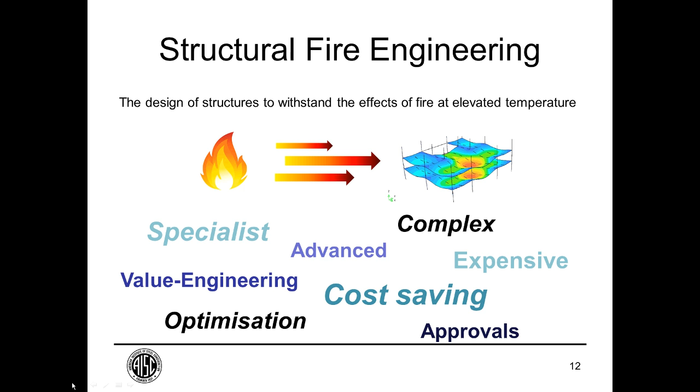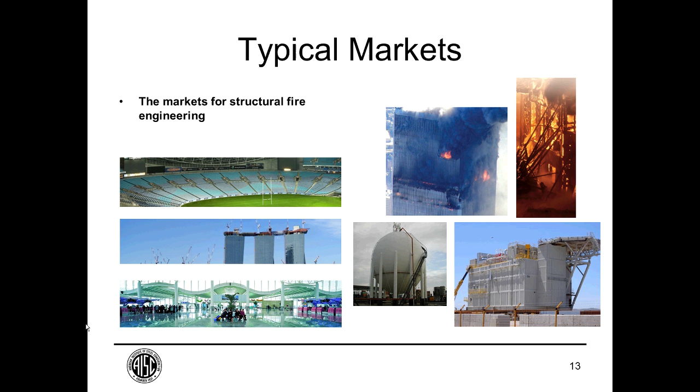And what are some of the benefits of doing this? Well, we touched on it earlier - cost, and it undoubtedly is one of the key reasons for doing this. But also looking at things like robustness, that's very important, maintaining acceptable levels of safety. Often structural fire engineering approaches can be used to permit more innovative and complex buildings, which were not necessarily possible due to prescriptive natures of some codes.

For example, very long span beams or truss systems, which when we try to correlate what we test in a furnace on a short scale, and we try to look at the understanding of performance at long scale, becomes a little bit more different. But architects these days are very keen to look at big open plan floor spaces, long span members, and it's trying to combine that innovative design together with structural analysis at high temperature, together with robust design, which is very important.

On the issue of robustness, this approach can be used to identify and strengthen weak links in a structure. If we design at ambient temperature, everything seems fine, the structure stands up. But from a thermal, high temperature perspective, it's not implausible that we could identify weak connections. We could look at columns, beams, or joints that need strengthening. As things expand due to heat, it generates strange forces which need to be considered. Likewise, as steel members cool, they generate contraction forces, which can cause redistribution that should be considered in a fire.

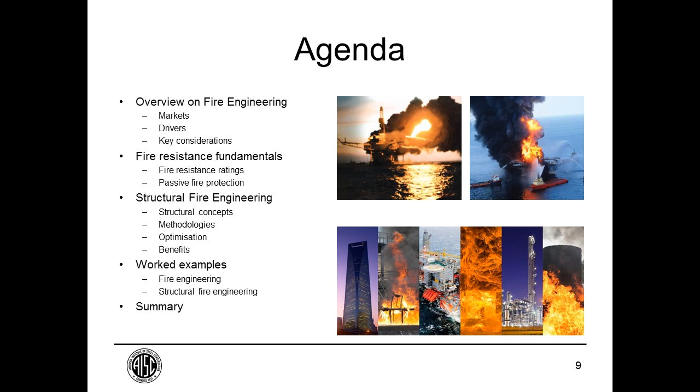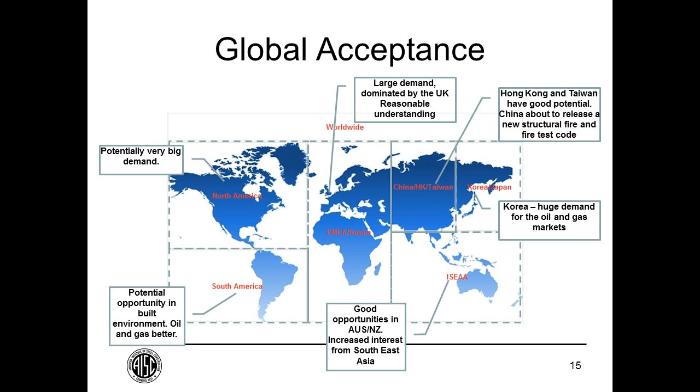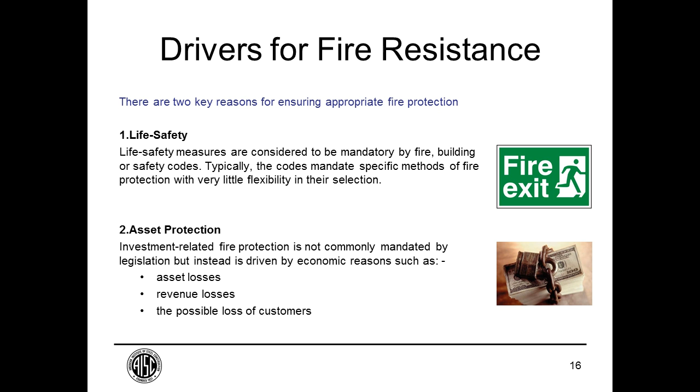And how do they achieve this? Well, there's two fire protection measures really: one called active fire protection and one called passive fire protection.

Active is similar to your automatic detection system, your sprinkler systems. It's anything which, in essence, will sit there and constantly monitor the scenario and the environment around it. And at the time of a fire, it suddenly kicks in and does its job and acts to either control, suppress, or alert.

Passive fire protection, on the other hand, effectively remains silent within a building until a fire occurs. Examples include fire barriers, fire stopping, steelwork protection. It sits there, and in the event of a fire, it just does its job without activating in any particular way.

And many projects and clients that I come across in different parts of the world sometimes say to me, well, I've put active fire protection measures in, therefore I don't need passive fire protection measures. And that's not always the case. Really, in the fire safety strategy of a building, both active and passive protection measures are integral to fire safety. The use of one does not negate the use of another.

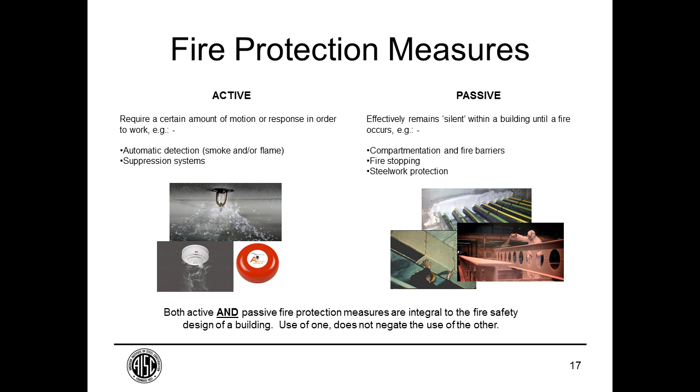The first one is a design fire assessment or modeling. That's understanding how a fire is going to ignite, how it's going to grow, how it perhaps will travel around within a building. Fire engineers will do this frequently using simple calculations through to more detailed calculations.

The second one is elimination of fire protection from certain members. For example, there may be a localized fire impinging on a specific portion of a structure, and therefore there's a justification to say that the structure away from that design local fire can be left unprotected. We also see requests where members are protected framing between columns, and technical justifications put forward to say that the secondary members acting within the bay can be left unprotected due to the effects of tensile membrane action at high temperature.

I'll touch on that again a bit later. The third one is modification to fire resistance periods. This is a very common approach used across Europe and the UK. For example, taking a code-rated 2-hour building and justifying why it can be a 90-minute building instead. We see this very, very frequently.

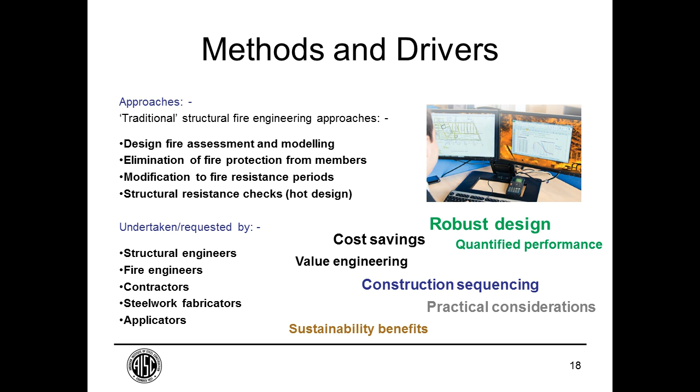So, considerations and basis. We've touched on the high-level overview for fire engineering and what it gets involved. Now we're going to delve a little bit deeper and take it further.

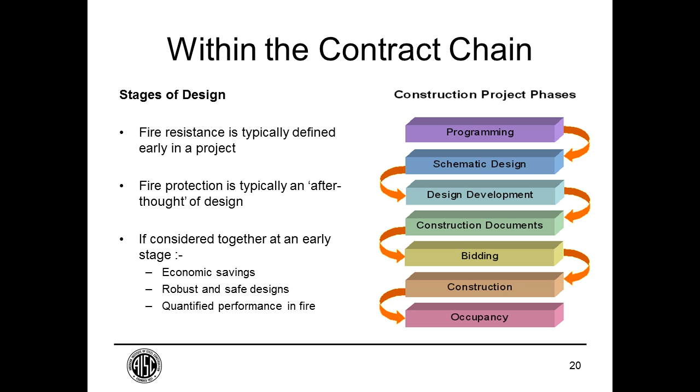Through experience, I know that fire resistance is typically defined early in a project, i.e. the hourly rating, but the fire protection to achieve that often comes as an afterthought of design. Hopefully one of the outcomes of this webinar is that the earlier it's considered, the greater the benefit that can be had.

So some basic concepts. Simplified diagram here to look at three different aspects of fire resistance. If I've got a fire acting underneath a slab in this case, then I'm going to be checking for three different things.

Starting bottom left, I'm going to check resistance to flames and smoke. Essentially I'm saying I don't want cracks to open up and for heat or smoke to pass through and cause multiple floor fires. So I don't want fire to spread from the floor below to the floor above.

Transmission of heat should be limited, illustrated by the fried egg on top there. So if I've got a fire underneath, then I don't want excessive heat to transmit and conduct through that slab to cause a fire of potential combustibles on top.

And the last one is that the structure should not collapse. So for the given applied loading, the structure should be able to get to a certain temperature but not collapse. And that's where we're going to focus the remainder of this talk on today.

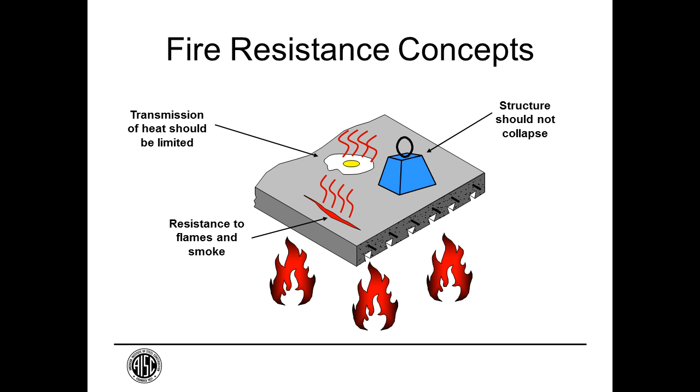So some very simplified concepts. What happens when a structure heats up? Consequence of failure - I'm going to start off with beams. The simplified diagram shows there that if I heat a beam up, then it's going to start to expand. As steel gets hot, it expands.

In this case, you might get to see some sort of deflection. It may start to bow down. Doesn't necessarily mean it's going to collapse. Sometimes a large degree of deflection can actually be tolerated at high temperature. And it doesn't matter where that is - it could be high in the building or low down. The scenario is pretty much the same.

However, if the thermal expansion or contraction forces are too great, then we could lose the joint. The joint could collapse and give way. In that situation, you then have a long column or a tall column which is unsupported over a large length, and then that's at risk of buckling failure.

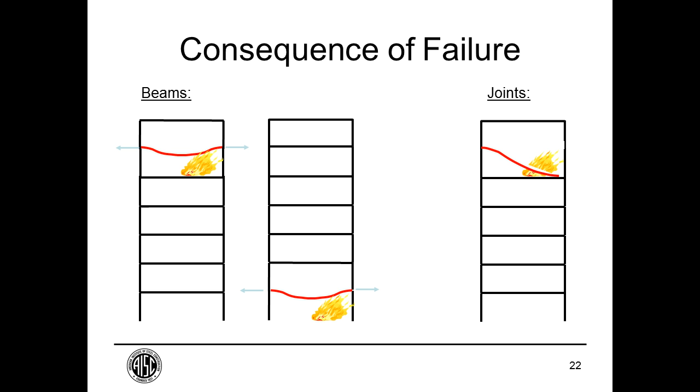Columns are a lot more critical. If we have a fire which impinges or impacts a column to the point where it's going to lose structural stability, then as you'd expect, the consequence of failure of that could be very large. It doesn't matter where you are, either high up in the building or low down, it's pretty disastrous if that's going to happen. So deliberately simplified, but just to illustrate what can happen and to get you thinking.

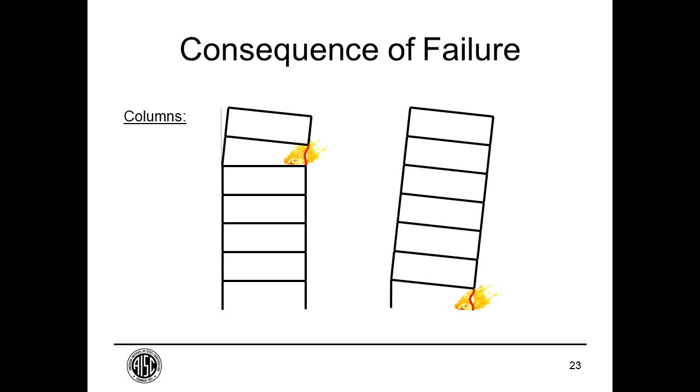And it's not only looking at single element members. We can also look at the concept of disproportionate collapse, which I know that many of you will consider in your day-to-day designs. And the concept is very similar when it comes to fire resistance.

In this case, you can see that the blue triangles represent the load being carried by the columns, the internal columns carrying, in this case, a little bit more than the external columns. But suddenly I have a floor fire which is starting to affect my structure.

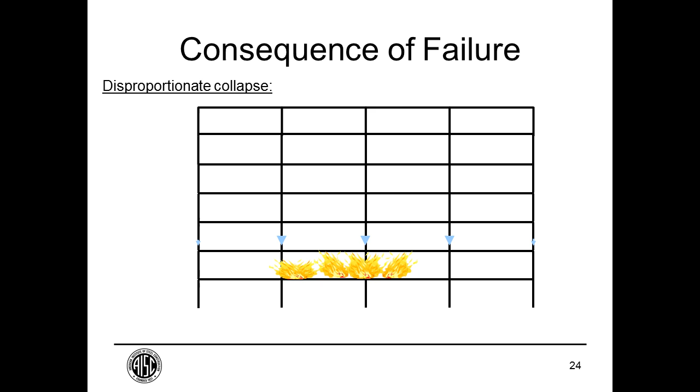What happens is, in this case, we've got the column losing its capacity and the whole building starts to collapse. The forces get redistributed out to adjacent columns, and that fire may continue to grow and spread over the floor plate to the point where adjacent columns go and the force again gets redistributed, and so on, for disproportionate checks.

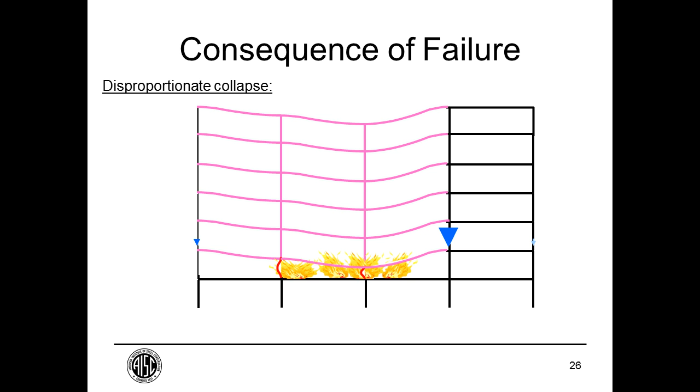And the same approach can be done at ambient as for fire. You can do redundancy checks. If you feel that a column or a particular part of structure is vulnerable to the effects of fire, then you can use an ambient model perhaps and just do element removal as a simplified check to see whether it can still stand and the redistribution of forces can be carried by the structure.

So, to get you thinking a little bit more, I've got an example here of a connection design. And I've done it in terms of ambient design and fire design. Let me talk you through this.

If we start with a structural model of a building, generally the connections in a model would be idealized - pinned connections, for example, or fully fixed, or carrying some proportion of moment. The structural engineer will then take the forces acting at the ends of the member and pass those to a specialist to do the connection design, or they may do the connection design themselves. It depends on the engineer and the practice.

But what they're doing is taking a simplified approach - taking out inputs to be used in a more detailed analysis, in this case the design of the connection, which incorporates more detailed checks. I've listed there: bolt spacing, direct shear, and so on. So there's a lot of very good, detailed work done at ambient.

When we take it to fire, to high temperature, then I put straight away a question mark. And people say, well, I assume it's okay - it works at ambient, I've requested some sort of applied protection to keep it cool, therefore I assume it works. There's a lot of assumptions when it comes to fire.

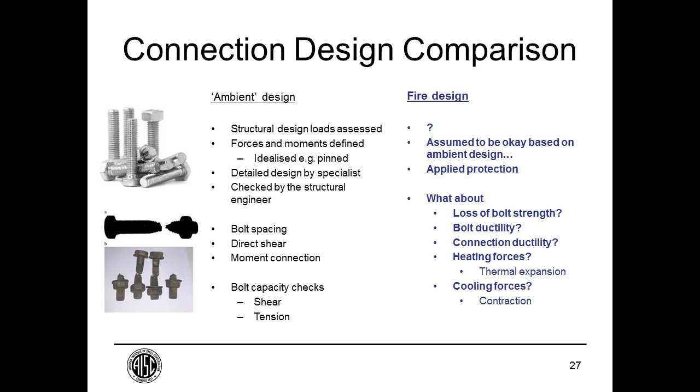So how do we achieve fire resistance? For many steel members, it's unlikely that they will have an inherent fire resistance greater than about 20 minutes. It does depend on the section size - very thick, stocky sections will have a higher inherent fire resistance rating than a very thin, slender section.

But let's take the example of a building at 1 hour or 90 minutes. It's extremely unlikely that it's going to have inherent fire resistance without some sort of protection. So we have to put some sort of material on there to maintain its structural stability.

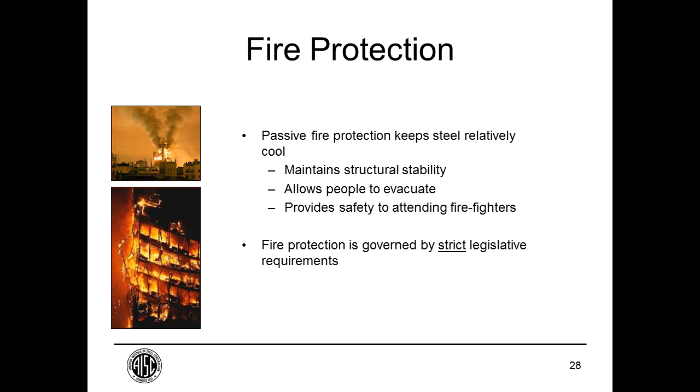And how do we achieve that? Well, there's a number of proprietary systems out there: intumescent coatings, boarding systems, cementitious coatings or SFRM as commonly referred to in North America, insulation blankets, bolt caps for bolt protection, or concrete filling of tubular members, or concrete encasement of, for example, I sections. There's a vast range of options available, and different reasons as to why you may choose one over another.

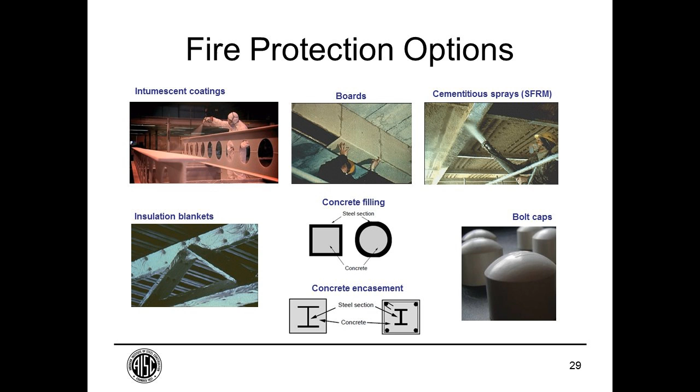So let's delve a little bit further. Let's consider some of the codes and standards. Where does the fire resistance rating actually come from? Well, there's a wide range of international fire safety codes that help designers design buildings, and I'm sure you'll be familiar with some of the ones on here - the NFPA standards, the IBC, the International Building Code.

And I just put down a couple there that we use here in the UK, for example. But I work in countries all around the world, and I get to understand all these codes inside out - what the similarities are and what the slight differences are. So somewhere within this code, let's take the IBC as an example, it'll tell me how much fire resistance is required for my structure.

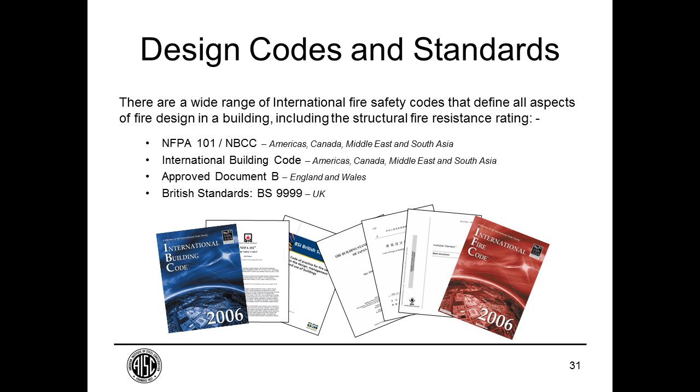And these test standards fundamentally put that assembly into a furnace, subject it to a temperature time regime, so they heat it up over time, and monitor temperatures, deflections, stresses and strains. And if a proprietary system, on a piece of steel for example, can pass that, then it gets a certificate

So let's look at the fire resistance rating a little bit closer. And I'm going to take an example from a couple of different standards. I'm going to start with one from the UK just for awareness and appreciation only, and then we'll look at one relevant to the IBC.

This is a table from British Standard 9999, and it's a simple lookup table, and 99.9% of fire resistance ratings around the world are done using a table similar to this. It's a very simple 20-second lookup, and in many cases that's it. For that aspect and remit of work, it's done. No more consideration given to fire resistance.

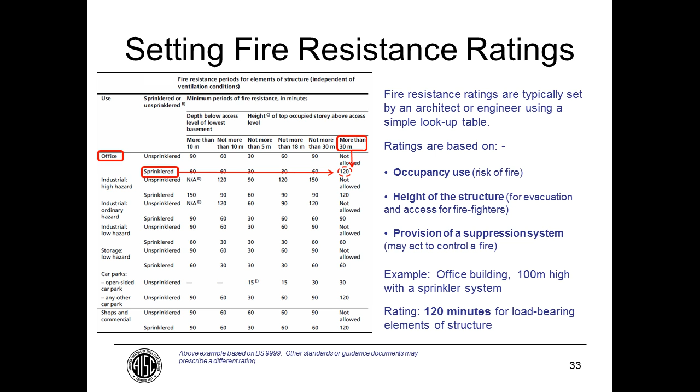And it's very similar when it comes to the IBC NFPA approaches. They also look at the intended use and occupancy. They consider the building area and the building height, accessibility for the fire department, distance from other buildings, and suppression systems and construction materials. And there's a statement in IBC which says the structural frame is considered to be the columns and girders, beams, trusses and spandrels having direct connections

to the columns and bracing members designed to carry gravity loads. And it's that last sentence, gravity loads, which we'll touch on a little bit later with respect to load combinations and degree of load acting on a structure.

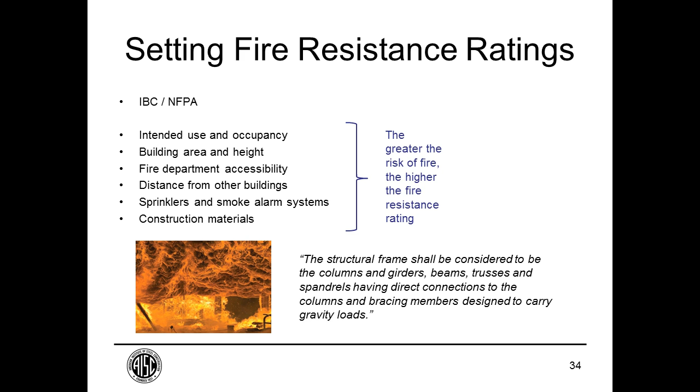So let's take the same example, that 100-meter high building, 328 feet, 25 stories, and it's an office building. So within the IBC, it's identified on the left-hand side as Group B for business. And then I know it's a steel building in this case. I know it's going to be a non-combustible item, so we're looking at Type 1 or Type 2 construction at this stage.

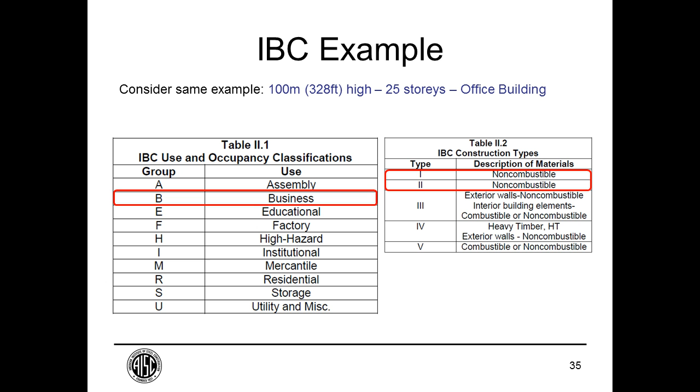So further using the IBC, I've got a further table. In this case, I've highlighted the row which is with respect to B for the business group. And then you can see along the top it's got types of construction, Type 1, 2, 3, 4, and 5. And then in the table itself, you'll see two numbers. The top number is the number of stories, and the lower number is the square feet of a building.

So in this case, I know that it was 100 meters or over. It was over 300 feet high. It was over 25 stories. As I look from right to left along row B, I look at the number of stories, and I can see that when I get to UL, which means unlimited, then I can go to that one. So I'm focusing in now on Type 1, Type A. If it was Type B, then I'm only permitted to have 11 stories in the building.

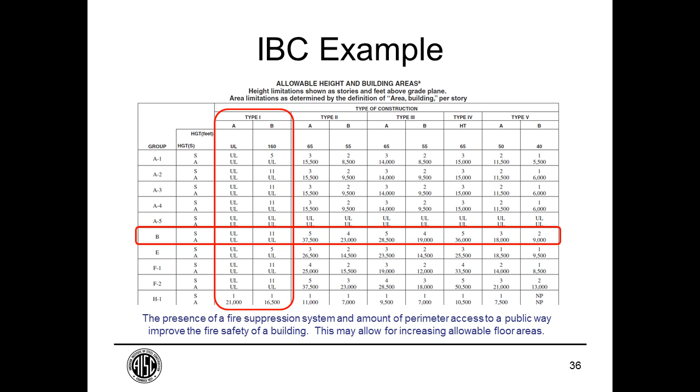Now you can use a fire safety suppression system to make modifications in some respect to fire resistance periods. We'll look at that on the next slide.

So I now know that I have a Type 1A structure for my office building, which is over 300 feet high. So the final table I look at in IBC is this one, and again, I've highlighted Type 1A.

I've looked at the structural frame, which says I need 3 hours. The floor construction, including supporting beams and joists, 2 hours. Below that, the roof construction, 1.5 hours.

I put a note at the bottom to say for high-rise buildings where sprinklers are provided, reductions in fire resistance ratings, so looking at reduction from Type 1A to Type 1B, for example, may be permitted in certain circumstances. I won't go into the details of that just now, but you can look at the relevant section of the IBC for details on that.

So for my tall building, I have 3 hours for the structural frame, 2 hours for the floor construction, and 1.5 for the roof. That's in comparison, for interest, the UK example, which would say all 2 hours. And then on top of that, fire engineers in the UK will invariably engineer down from 2 hours to 90 minutes on a high-rise building, providing they can justify it.

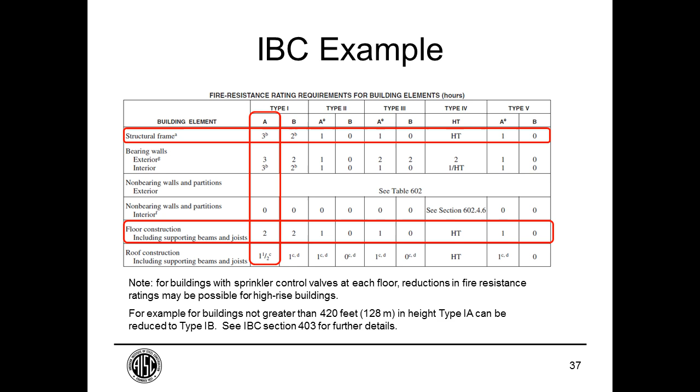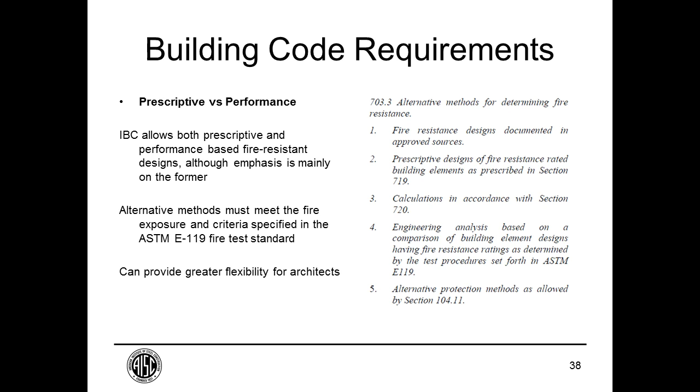So fire resistance ratings. It's a little bit of a bugbear, if you like, of mine, pet hate, and I talk to a lot of structural engineers, and I say to them, tell me what a fire resistance rating actually is. And they look at me and they say, well, it's an hourly rating. It's 1 hour or 2 hours. And I say, okay, fine, let's assume it's 2 hours or 120 minutes in this case.

What, though, is the acceptance criteria? At 2 hours, what should or shouldn't happen? And then I get different answers back to that, but generally along the lines of, well, the structure shouldn't collapse. It should maintain its stability. It should be able to still carry its applied load. And that's fine. When I say, well, how do we do that? I get a lot of blank faces looking back at me.

A lot of structural engineers have an appreciation of fire at a very high level. Some better than others, granted. But in many cases, a lot of structural engineers I speak to say, fire resistance or the hot design, it's not within my remit. I'm not being paid to do that. It's the responsibility of the architect. But when you start to look at responsibilities and some of the technical aspects that are required when you look at fire resistance, then there is an aspect of structural analysis which can and perhaps should be done.

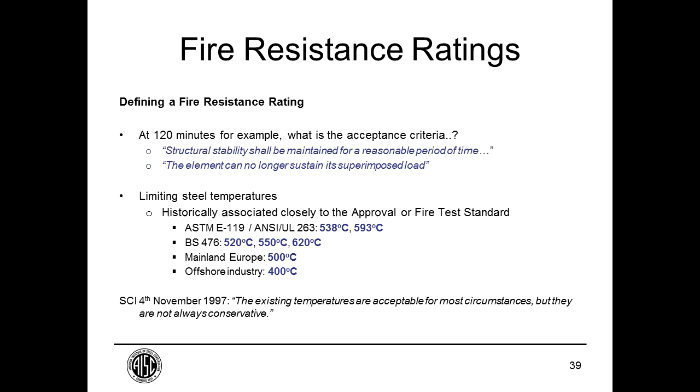So the architect will typically define the fire resistance period in time, and we would look to the structural engineer to provide information in relation to 538 or a limiting steel temperature.

So fire behavior, let's look at this a bit closer. Fire is fundamentally a load. If you think of some of the buildings you design on a day-to-day basis, you may look at all sorts of different load cases: ultimate limit state, serviceability limit state, perhaps deflection is controlling, wind is a big load type, snow depending on where you are, seismic, vibration. There's a number of different checks we often check our structures against.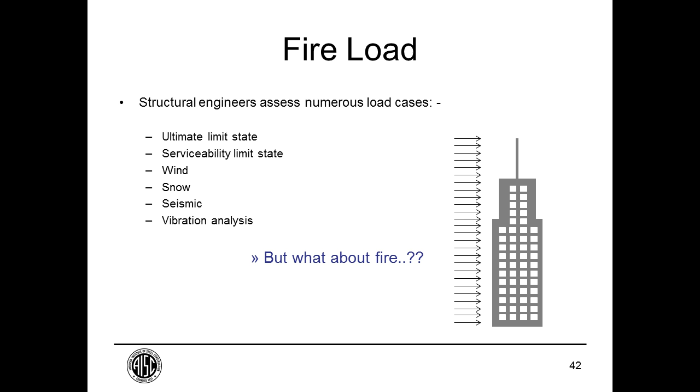It's going to be very expensive and totally inefficient. But yet that's exactly what we do when it comes to fire. We assume worst case, critical, fully developed fire in many situations to occur simultaneously across an entire floor plate or across an entire compartment, and then we assume that to be the worst case. The reality is, it might not be. If we start to look at it on a case-by-case, building-by-building basis, in many cases it's not as severe as that.

So it's all about fire engineering. This is the subject of this whole webinar. And I said before, fire engineers may work on a project and look to reduce a fire resistance period, say from 2 hours to 90 minutes, or 3 hours to 2 hours. They do that by looking at how fires grow.

I've put some of the aspects which they'll consider when they do that. They'll look at the fuel load - what is actually at risk of burning in the building itself. They'll look at the room geometry: are we looking at a very small, cramped, enclosed space, or a very large, expansive floor plate with very high ceilings? They'll look at ventilation conditions.

Are we looking at a masonry or brick type building with very small windows, or modern construction which likes to employ a lot of glazed facades? In the event of a fire, if those facades break, then the ventilation conditions completely change, and that will influence how a fire might grow. And is there a sprinkler system? That might actually help to control the fuel load.

And I've put a question there: is this structural fire engineering? Yes, it is in a way, but it's not involving any structural analysis. It's defining the load for a structural analysis, if that makes sense. And whenever a fire engineer looks at this and proposes to modify a reduced fire resistance period, it's always subject to approval by the authority having jurisdiction.

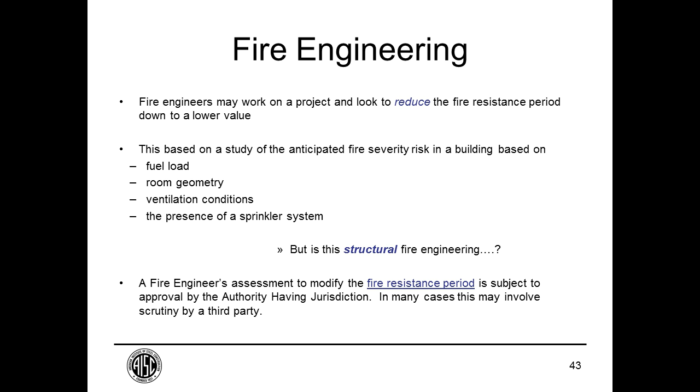So, design fires. Let's take a look at these now. The graph at the bottom is the ASTM E119 standard fire curve. This is what we expose assemblies to within a furnace.

You can see pictures of a typical furnace on the left with some structural elements within it. It aims to create a uniform temperature prescribed by that curve for the required duration of the test. The top right shows a tested assembly being subjected to high temperature. So that's one design fire.

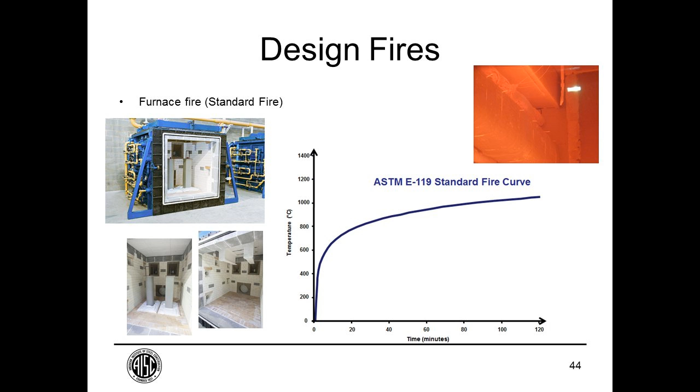Fundamentally, that design fire was always intended to test different assemblies and products with respect to each other. It wasn't necessarily trying to achieve a realistic fire, it was trying to achieve a worst case, fully developed, post-flashover fire.

Fire engineers may look at things in more detail, in terms of a localized fire or a fully developed fire. A fully developed fire is when everything in the room is ignited and burning, and you get an almost simultaneous temperature acting everywhere within the compartment. It's considered by many the most severe type of fire, but that doesn't necessarily mean it would produce the most severe response of the structure. We'll look at that a bit later.

A localized fire could be a trash can, a sofa, or some localized portion of fuel. Fire engineers can use empirical calculations to work out, based on the diameter or size of that fuel, how high flames might get and for how long it might burn. Those flames may either impact the ceiling, in which case the figure on the bottom right shows flame lengths and temperatures that can be estimated, or they may not, and instead grow in a conical or pyramid-type shape, with radiation heat starting to affect the surrounding structure.

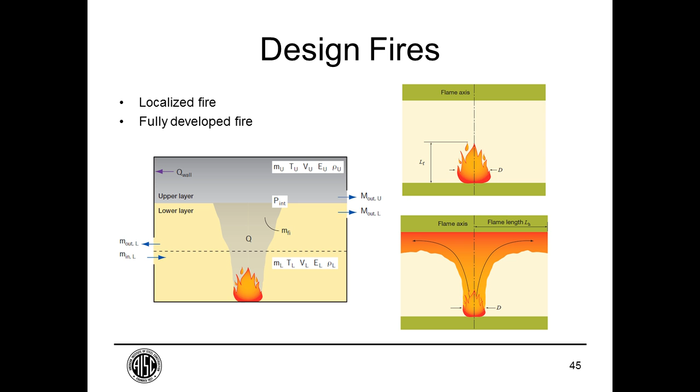Or fire engineers may step it up one more level and look at something more complicated with respect to numerical modeling. Here we're looking at CFD, computational fluid dynamics, which can work out how fires may grow and travel around a building. But it's worth bearing in mind that any approach like this would need to be fully validated and verified to make sure it's fit for purpose and correctly captures the thermal effects.

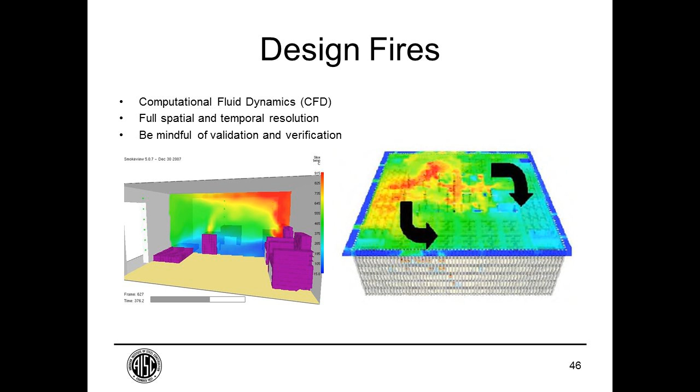So let's go back to our standard fire curve and look at it with respect to real fires. I know for a fact that the standard fire curve will go on and on forever. But if we move forward, we can start to look at a real fire and see how that fits in.

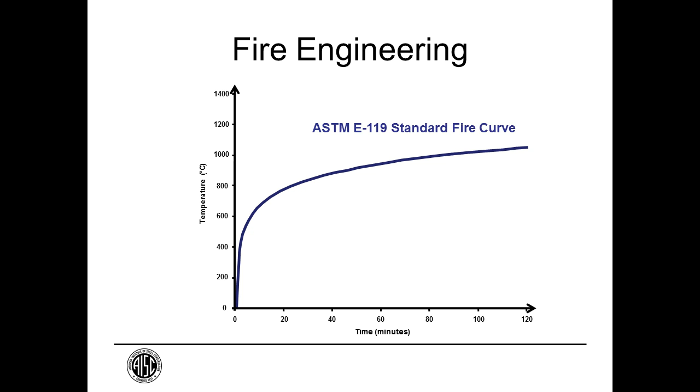The alternative is a short, hot fire. In this case it grows very fast, and the temperatures actually exceed that of the standard fire, but then the fuel burns out and it starts to decay and cool back down to ambient. So we're looking at real fires in the context of the standard fire.

But fire engineers will generally always refer back to the fire resistance period, because at some point we have to match that up with product performance or tested assembly performance. So they say, this is my real fire, how does it equate to reality? It's a simple energy check, the area under the curve. I've taken the area under the curve of the red line and equated that to an area under the curve of the blue line. So for that real fire, it's equivalent to approximately 50 minutes in the standard fire.

So if the code had said this building must be a 90-minute building, we can use this sort of approach to progress discussions and say, why don't we consider 60 minutes as opposed to 90? You can't actually physically sustain a 90-minute fire in this building.

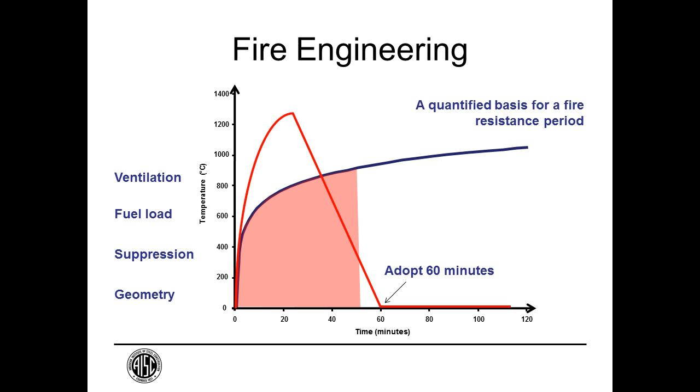That gives you an idea of why fire engineers get involved in a project and they look to make savings. It doesn't mean that we've lost any safety. It's still a robust method. It's been quantified, and there's the savings to be had.

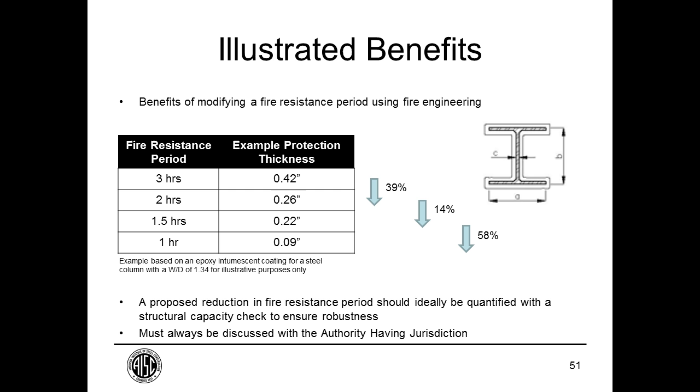So we've understood our fire, we've understood our load, if you like. Now we need to know how it affects our structure. And there's a variety of ways that it can be done. It's all about understanding the maximum temperature, or the temperature history, if you like, of a structural element.

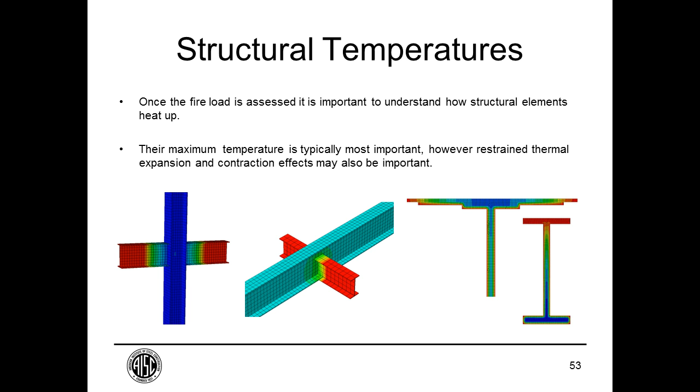Here's an example, back to our fire that we looked at earlier, that the fire engineer had evaluated using the geometry, ventilation conditions, and fuel load. And if we know the gas temperature or the fire temperature, then there's simple equations that exist in literature and in standards which let us derive the temperature history of steel, so we can understand how steel heats up with respect to a real fire.

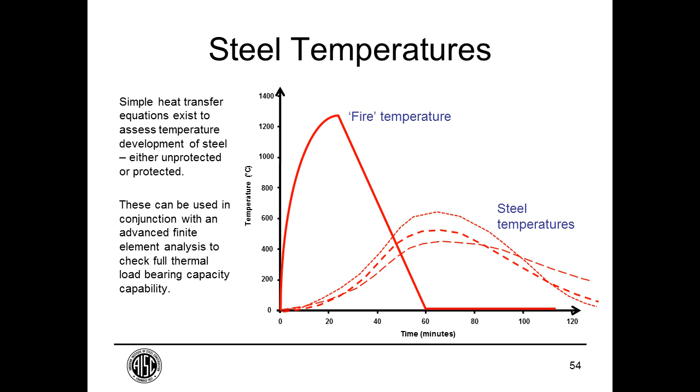That can be then input into an FE analysis, and then the thermal expansion of all the members and the thermal contraction and all the interactions at high temperature can be used to inform structural assessment and inform design. So it's deliberately simplified, but it gives you an understanding of how a fire can be considered, and then how that fire can be translated into a temperature on a structural member.

So the main aspect now is structural assessment. How do we actually figure out what the structure is doing now that we know it's heating up?

Let's go back to our fire protection concept. I said before that it's all about maintaining the limiting steel temperature for a given period of fire resistance, in this case 538 and 90. And we're going to look a little bit more closely at this temperature, this 538, and what can be done with respect to that.

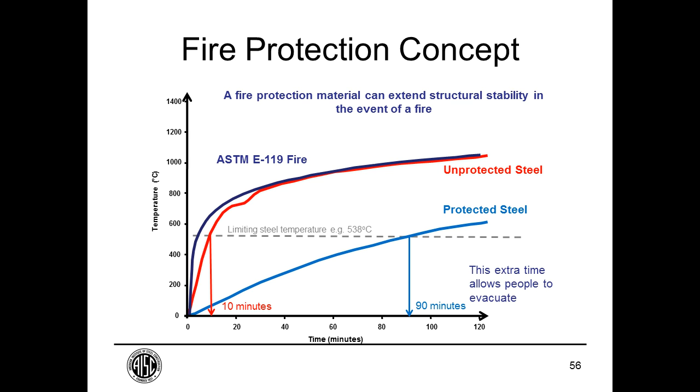So it's all about optimization. I speak to a lot of structural engineers in all parts of the world, and once we get onto the topic of fire protection, then I start to see light bulbs go on as we go through the talk, and they understand what can and can't be done.

Okay, it's very thin, it heats up very quickly. The thicker member, that's going to take more time to heat up before it burns my hand.

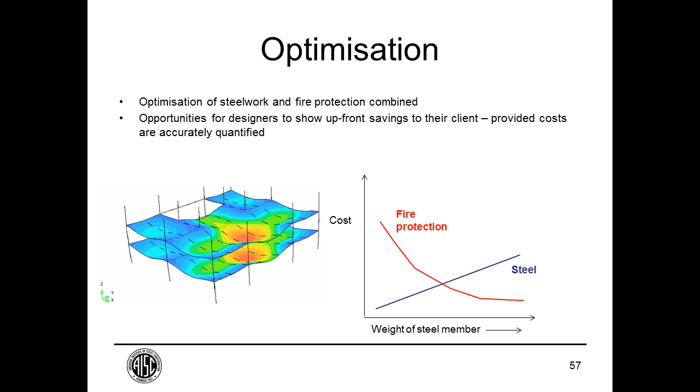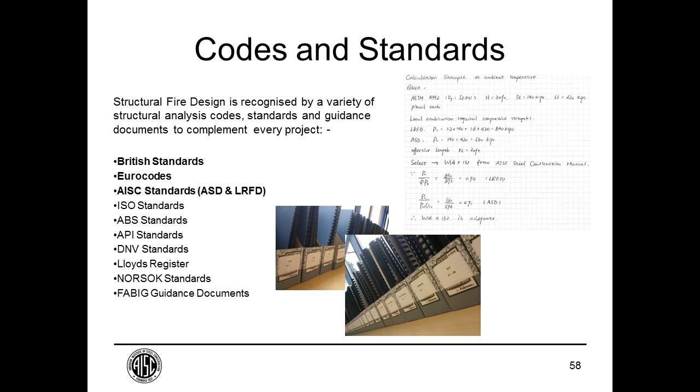I've also put some others underneath that - the ISO, ABS, API standards. These are more associated with the oil and gas industry, so some of you may have an awareness of those if you work in that industry. But they also make reference to structural fire design, and in many cases they actually refer back to AISC standards or to Eurocodes. So the three I've highlighted in bold there are probably the three most common structural fire standards that I come across within the industry.

And once you understand what the temperature is, you can then use that to inform how much passive fire protection is actually required and whether it's actually needed at all. Fundamentally, it's a function of the applied load.

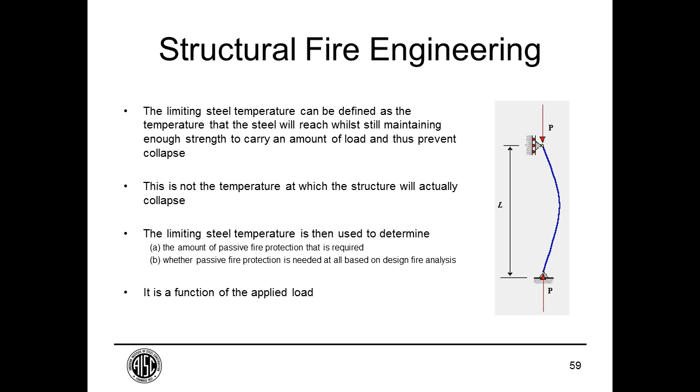So I say to engineers, I know you can all design buildings at ambient. I know you can all do the hand calculations or you can use the software, and I know that you're all capable of doing this. I say if you can do it at ambient, there's no reason why you can't do some sort of structural fire assessment. I put down there checks, for example, tensile or buckling resistance, moment and shear resistance, or lateral torsional buckling resistance, if that's to be checked. These are all things that we repeat at high temperature.

It's worth pointing out that these types of steel constructions are used on just about every single building here in London, because it lets people route the services through the openings, and not have to make provision for a service zone below the bottom flange. And for every 10 stories you use these for, if you've got a height limitation, you actually gain an extra story on top because of that. However, when it comes to fire protection and understanding fire resistance of these, they're very complex members to check.

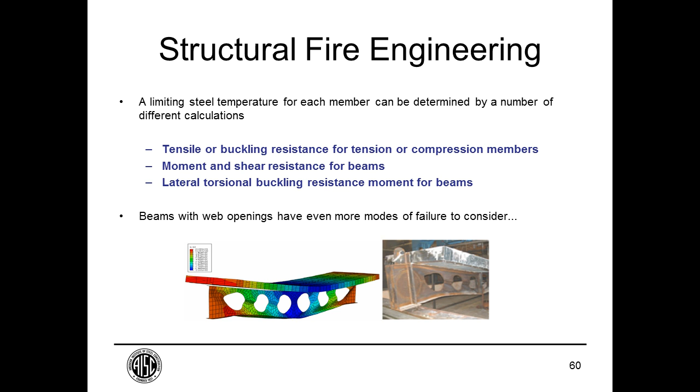So looking at AISC and the CSA equivalent, there is an appendix in each of those documents called their Structural Design for Fire Conditions. If you've not had a look at this, hopefully after this webinar you'll have a bit of an idea of what can actually be done for these.

The load case there, you can see 1.2 times D plus load effect from an extraordinary event, and then perhaps 0.5 times live or 0.2 times snow. I'll let you have a look at these load combinations in your own time, but just to make you aware they do exist.

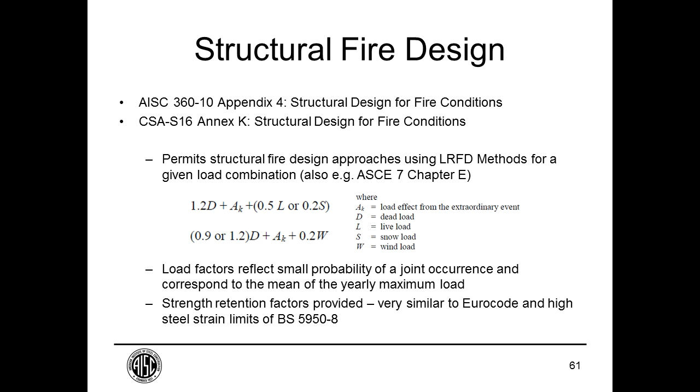Okay, so we've talked about this limiting temperature approach, and you see this number 538 used very frequently. It's worth understanding where this actually comes from. I've done a lot of research to try and find this out, because I know how all the other temperatures around the world are derived. This one I thought I'd pay a bit more attention to.

I looked at the SFPE handbook, the Society of Fire Protection Engineers, and they have a statement in there which explains it. It proposes that it's based on a 60% reduction of yield strength. So what you can see in this graph is how yield strength and stiffness both drop off and lose their capacity with temperature. I've got a strength retention factor which you can equate, in a simple manner, to the amount of stress acting on a member.

So if I use allowable strength design and say my member is not permitted to exceed 60% of its stress level, and draw a line across, you can see the temperature intercepts for yielding at 469 and buckling at 550. For a column or a member in compression, it's going to be a combination of yielding and buckling, and really 538 is about right — it fits right in between those two.

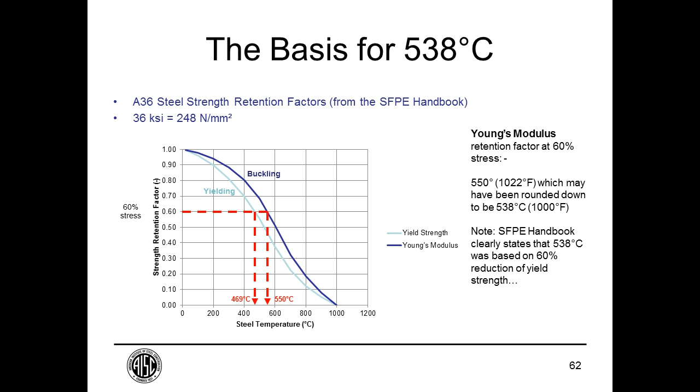The SFPE handbook, incidentally, does state that 538 is based on a 60% reduction of yield strength, which, if you look at the graph in my book, would actually be 469. But I would consider that to be very, very onerous.

So these are very similar strength retention factors, and these are actually given in the AISC and current CSA standards. They're very similar, if not almost identical, to the Eurocode retention factors, and they're based on strain limits in the steel for 2%.

The first thing to notice is that the buckling and the yielding have actually swapped over, which I would agree with, in that you're likely to get buckling before you get a full yield within your structure. But adopting the same principle, you can see the temperatures of 470 and 559, and somewhere in between that you're going to get a compression member failure, a buckling failure, of around about 538. So that's the simple derivation of where 538 comes from.

538 assumes a member to be fully stressed to its design limit, and it tries to maintain structural stability because of that. But it's quite evident that if you're not working at that 60% stress limit — if, for example, vibration or deflection dictates in design — you might only be operating at maybe 20 or 30% stress levels or utilization. If that's the case, doing a similar exercise where you read across this graph and down, in the case of 20%, it could be arguing for temperatures around about 700 degrees. So you can justify why it shouldn't be 538, why it could be 600 or 700 degrees. And when you do that, that permits you to reduce the thickness of material for fire protection.

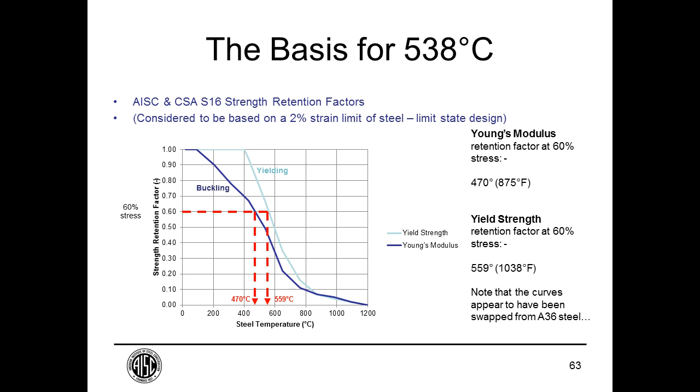So it's all about stress in structural members. Again, just to illustrate that same concept, I've got a beam on top which is capable of withstanding a certain applied load. If we take that applied load into scenario A, the beam's loaded to 100% of its ambient design capacity. That's going to induce a deflection and some level of stress in the member, and it's going to fail at a certain temperature.

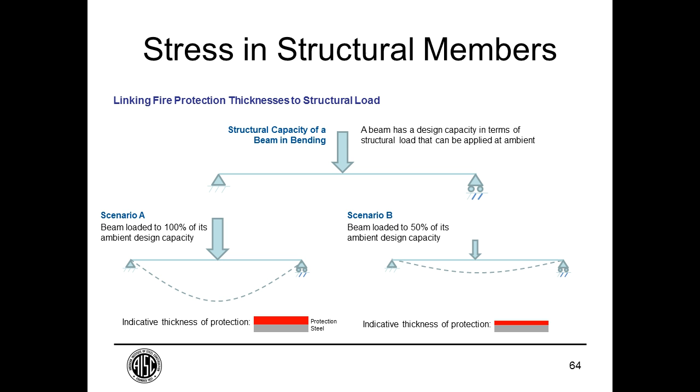To ensure that temperature is maintained, it's going to need quite a bit of protection. However, if you look at scenario B, the load is a lot more reduced, the deflection is a lot less, and the relative thickness of protection then goes down, because that beam is allowed to get hotter than, let's say, the 538, and therefore you don't need as much protection.

So let's have a quick look at rated designs. When we look at building codes, it may say a tested assembly in accordance with UL 263. So then we can dive into a rated design and pick something. But it's important to understand that whatever's chosen actually aligns with the need for the fire resistance of the project. It's appropriate to any structural fire engineering proposal, and everyone understands its limitations as to what it can and can't do.

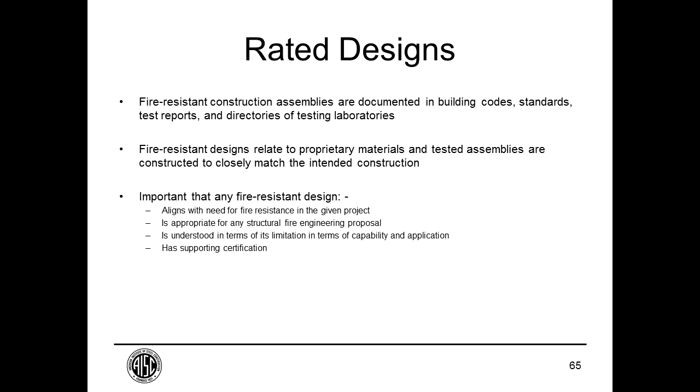So here's a typical listing table. This is for a proprietary product, and there's a list of steel sections in the left-hand column of the table, so you can see all the W-shaped sections. Then for 1 hour, 1.5, 2, and 3 hour ratings, it gives a thickness of protection. That thickness will be with respect to 538, and that's how the majority of fire resistance listings are done across North America.

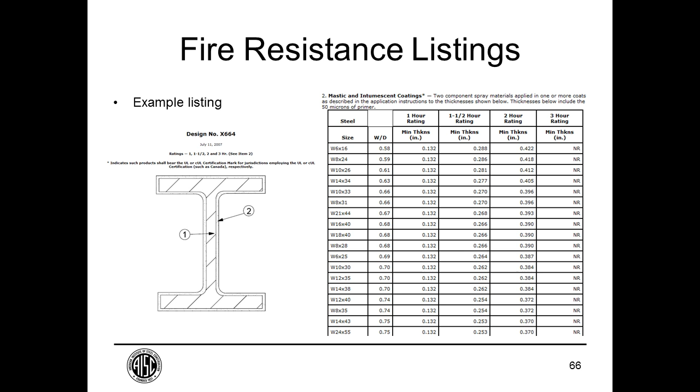And for each section size, there's different thicknesses with respect to failure temperature. So as a structural engineer, I can work out what temperature the steel work will fail at, and then I can pick a thickness relevant to it. This is how fire protection thicknesses are often derived outside of North America.

At present, ASTM E119 only prescribes a single point failure for beams of 593 Celsius, or for columns 538. So a structural fire engineering assessment can be done - you can work out at what temperature the steel will fail - but you would need, if you were to do that approach, to look at an alternative fire test which is permitted by IBC to justify a thickness relative to that temperature.

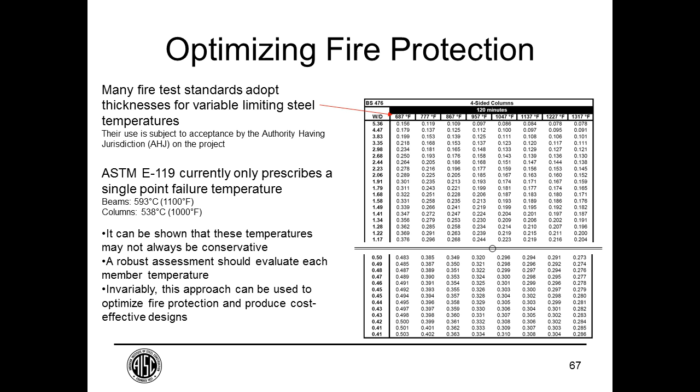The first approach, the fire engineering one, is subject to the authority having jurisdiction. It can be quite an in-depth engineered approach, a lot of calculations, a lot of reporting, a lot of work, and potentially quite an expensive approach. The structural engineering concept, in this case, is actually saving a greater amount on material, but it's a very, very quick structural check.

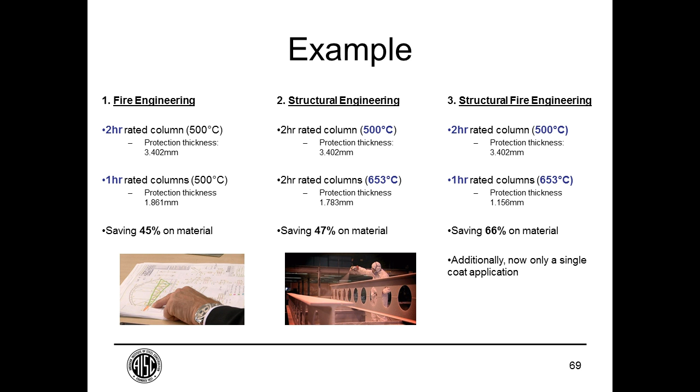And you can justify this using approaches using either FE or slightly advanced spreadsheet approaches. And this sort of work is done very, very frequently across the UK.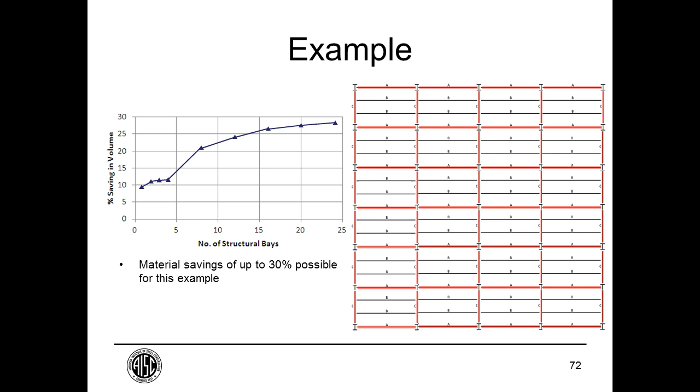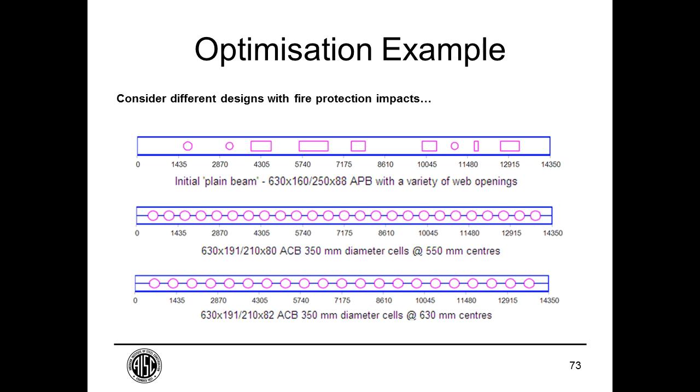And the next slide is probably best to summarize this up. The original design is on the right-hand side, and it shows the web openings. So this is the structural engineer's design, and I've put this with respect again to weight and cost. So we start off with our norms of 100% on each. The beam at the top was actually proposed by a fabricator as being lighter, more efficient, with lots of openings. And in doing so, the cost of that beam actually went up by about 8%. Yes, it saved about 9% in weight, but it became more expensive.

And then when he sat with a fire engineer and said, why is that the case? He ended up with the optimum solution, where the structural fire engineer changed the structural design, looked at the thickness of fire protection, looked at the number of coats to achieve that, and then looked at the cost of steel, together with the cost of fire protection, together with the cost of application. And when you combine all of those, then playing up and down this weight scale becomes quite important. So we went from the structural engineer's original design to a lighter, more structurally efficient but very expensive solution, back down to a more structural fire engineered solution, which was of benefit to the project.

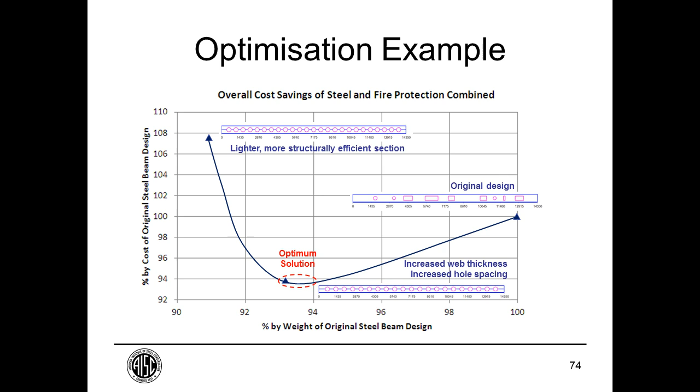Okay, so I hope that's given you a little bit of an overview of what can and can't be done. We looked at simple fire resistance ratings all the way through to more complex issues. I just put a list of further information that I can let you peruse and read in your own time.

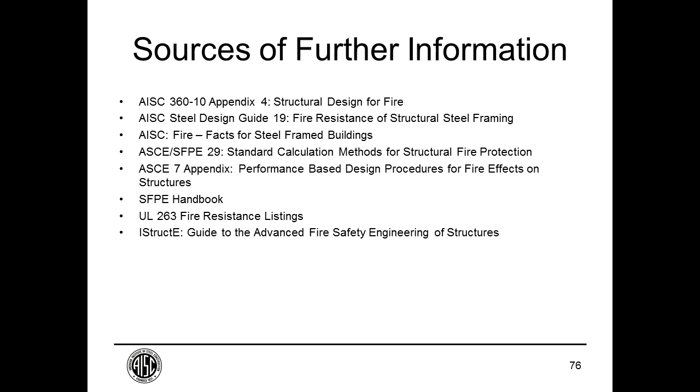So if we summarize and finish up, we've looked at structural fire engineering and the markets where it is and where it's not done. It's generally a performance-based design permitted by code, and it's all about understanding your fire, how it heats and impacts the structure, and what the structural response is. It's used extensively around the world, but perhaps less so at present in North America, though there's plenty of case studies to look at.

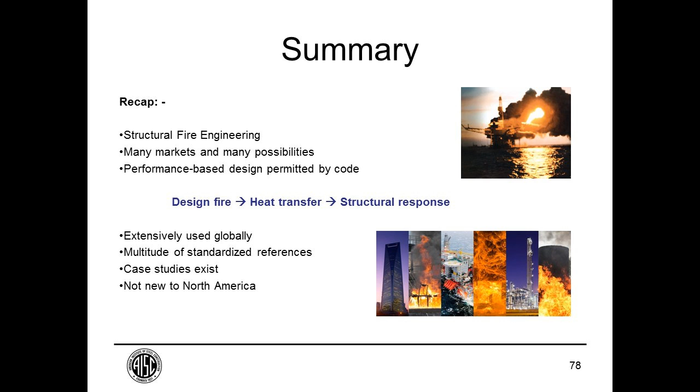There is a big demand for this across the entire contract chain. Obviously there are different drivers as to why that may be done. I see an increasing engagement with structural engineers and a willingness to now consider hot design. These can be done using simple checks, or with the help of a fire engineer, more advanced methods can be used to bring extra savings.

The AISC guidance standards do actually have ways to permit and allow this, but be aware that at present, ASTM typically doesn't always use a variable temperature to look at different thicknesses for steelwork. Always engage with authorities having jurisdiction if you want to look at an aspect of structural fire engineering.

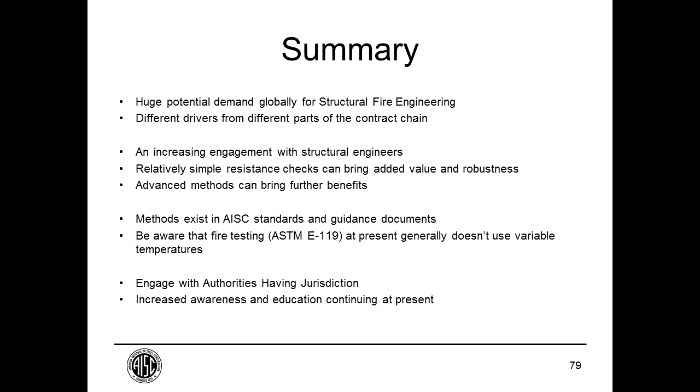And the last slide, really just to sum up, structural fire engineering and the codes associated with it do allow designers to exploit the properties of structural steel to its maximum at the fire limit state. If used effectively, it can bring significant benefits to a project to produce robust and safe designs, which is always paramount, quantified structural performance instead of assumed performance, and invariably cost savings fall out of this approach.

Yes, fire engineers have the ability to assess performance in fire, but so do structural engineers, and even more so when they engage with a fire engineer. The last two thoughts I'd like to leave with you: first, fire should be treated as an important load case in its own right, just as wind, vibration, or snow might be, and fire protection should not be an afterthought of design, because that's when problems can arise. The earlier it's brought into the design stage, the more benefit it can bring to a project.

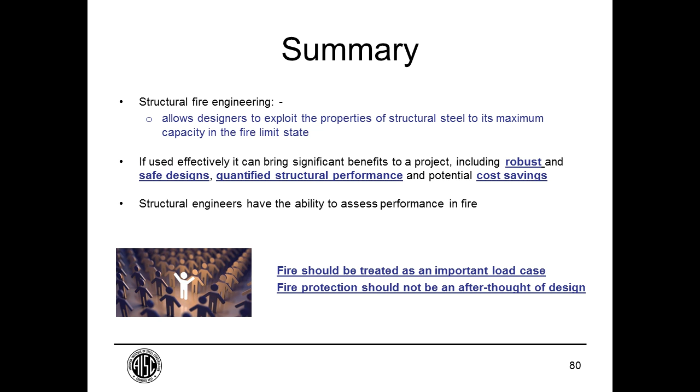I'm going to navigate us to slide 70. We have a question about the membrane action here. Presumably the membrane action would increase the connection forces. Does that often control or influence the design?

Oh, absolutely, yes. The connection forces are absolutely critical in these cases. We tend to see engineers who do this approach use FE models where they'll have a representation of the connection being considered, which again has properties that change with respect to temperature. For example, if it's welded, there are weld reductions with respect to temperature. If it's a bolted connection, then bolts have their own strength reduction with respect to temperature. So yes, sometimes additional features may be required for the connection or changes to the primary members, or with respect to the reinforcement in a concrete slab, there may be a requirement to increase the reinforcement level above some of the primary members to make sure that rupture doesn't occur.

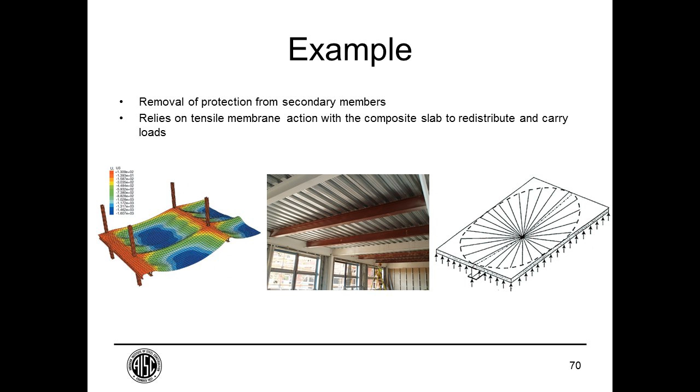Yes, the first part of that question is it's predominantly in North American tests that we see the requirement for a fire hose test, which is after a fire has occurred, can the assembly withstand the cooling and contraction forces that occur on application of water as a result of firefighting activities. It's predominantly in North America that we see that requirement, although I recognize it's a very important situation, especially when firefighters are requested to go in and suddenly change the thermal environment of the structure. But no, it's primarily North America standards that require that.

The next question is, how does the International Code Council, ICC, recognize fire design?

Good question. A lot of people look at fire design, and I mentioned it in the presentation. They'll say it's not something you can do, not something accepted in North America. But there are numerous cases which can be referenced, and I know some people on this call will have experience doing a fire engineered approach with respect to structures in North America. If you look at the IBC, it does state that alternative methods to demonstrate fire resistance can be done. There's nothing stopping you putting forward a proposal, providing you can demonstrate the intent of the ASTM E119 test is maintained, and that the authority having jurisdiction is happy to accept and review those calculations. There should be nothing stopping you proposing that sort of approach. And I know it is done.